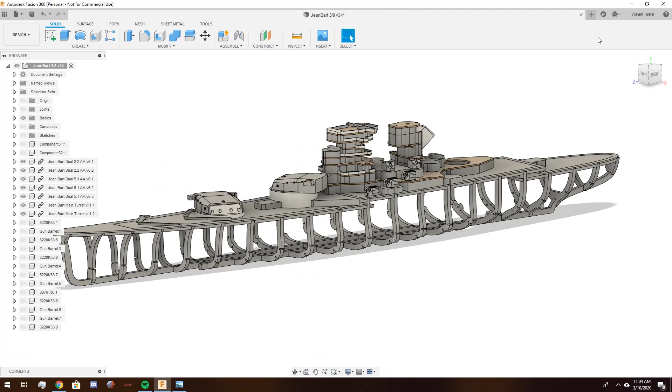So let's get started. One of the first things that you want to do on any of these kind of projects is you're going to need to insert a canvas. So let's just go ahead and start fresh. Let's close all these files out up here. So in your new Fusion 360 window, use the Insert tool. Insert Canvas. Insert from My Computer. And then navigate to wherever you have your chosen file.

Now, when I'm working, I like to have the ship oriented correctly. So as you can see right now, we are backwards. The back of the ship is facing the front in Fusion 360, so we're going to do a horizontal flip. Something else that I like to do is I like to try and have the canvas on the correct plane.

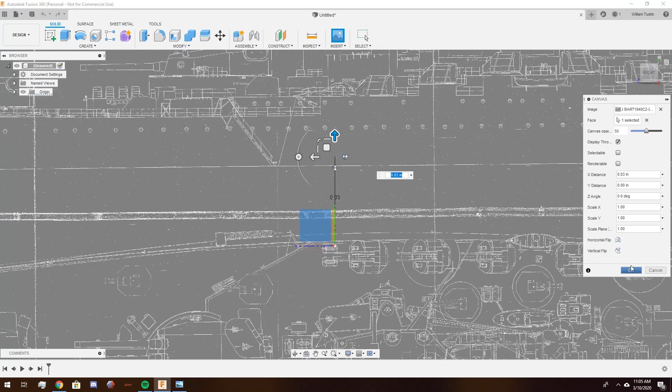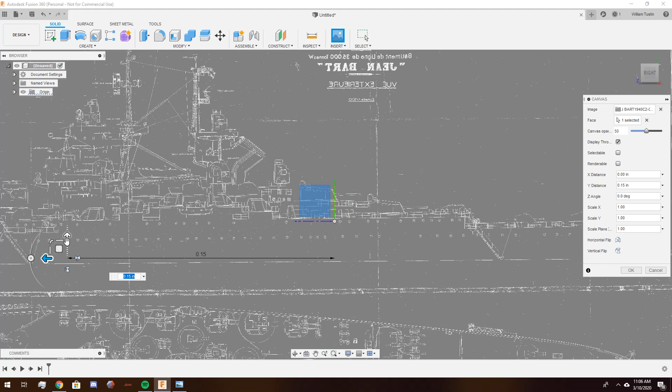So I am going to bring the canvas down because we're going to be working on the secondary gun turret, not the entire ship. I'm going to bring the canvas down and over. So that way the bottom of that gun turret is on that blue line, or as close as I can get it. All right, that looks pretty good to me. Okay, we have our canvas placed.

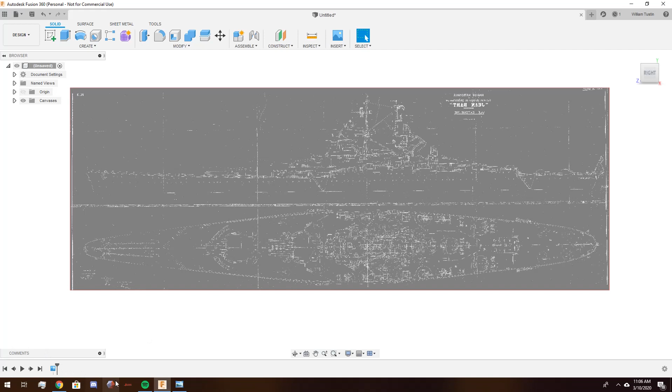Now, we need to make sure that our canvas is scaled properly. But before we do that, I just realized something. You can see down here, we have this little timeline bar. I don't normally like working in Fusion 360 with timeline enabled. So we're going to go up here to the document settings, right click, and click on Do Not Capture Design History.

Every person is going to be different in how they like to use this software. I do not like design history. It removes some of your potential options and some of your workspaces, and it's just not how my workflow works. So we're going to turn it off for this tutorial.

Anyway, we need to make sure that this canvas is scaled properly for the actual model ship. You can make your parts at whatever size this is right now. However, when you try to put a hole for a gun barrel or a bolt hole or anything like that, when you scale it up, it will not be the correct size.

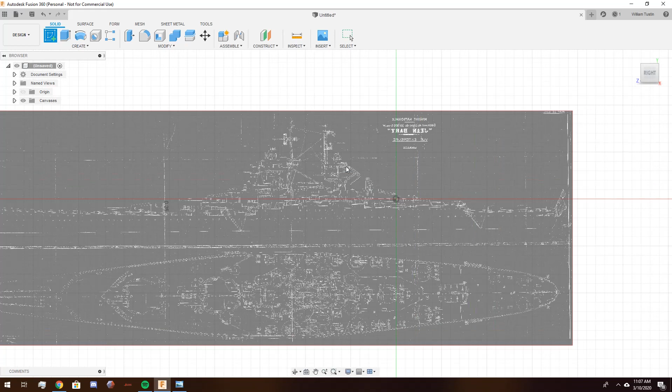So, in order to scale this, we're going to create a new sketch. And we're just going to click here on this plane. And then we're going to come over and we're going to drop a line. Drop a line on the ship's nose. And then we're going to do the exact same thing on the stern.

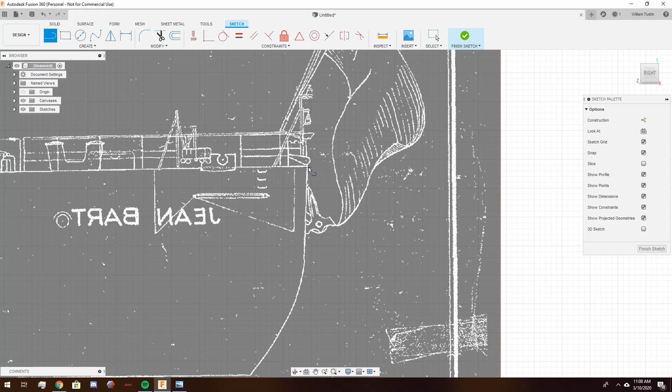And now we're going to measure using the Inspect tool. We're going to click on the line at the front, and we're going to click on the line at the back. And we have been given 0.651. Navigating over to the IRC website, we see here that Jean Bart is supposed to be 67.75 inches long. Bringing up the calculator, we can easily do the math, and we now have a percentage that we need to increase this canvas by.

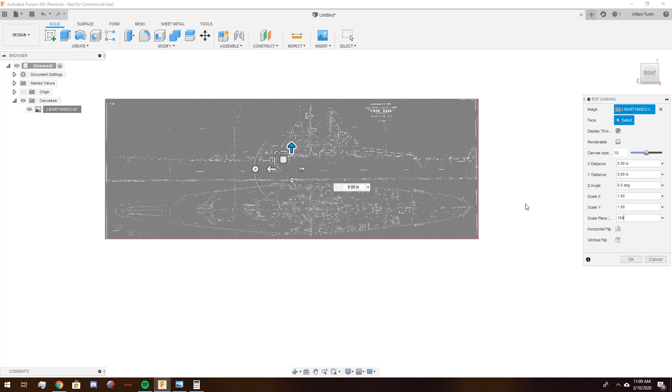So we bring up Fusion 360 again, hit close, hit finish sketch. This sketch will never be used again. You can go ahead and delete it. Select the canvas, edit canvas, and down here where it says scale plane XY, type in 104.07. And here we are. This sketch is now the correct size.

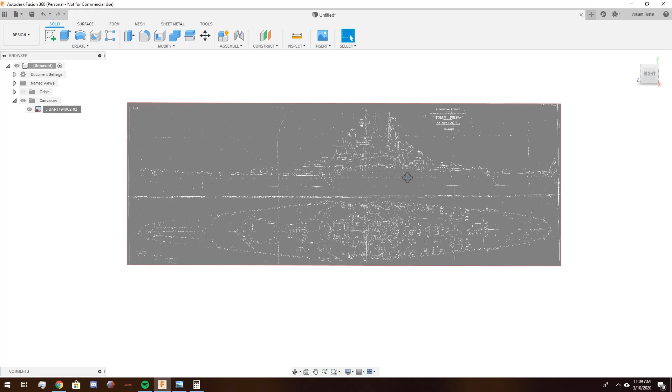Now, this is nice because this one picture gives us both the side profile and the top profile. However, I like having the top and side profiles where they actually would be on the model, instead of having to do all of my side sketches up here and my top sketches down here. So we're going to take this canvas and we're going to click Move Copy. We are going to create a copy and we are going to rotate it 90 degrees. Then we're going to click OK. Oh, no, we're not. That is not what I wanted.

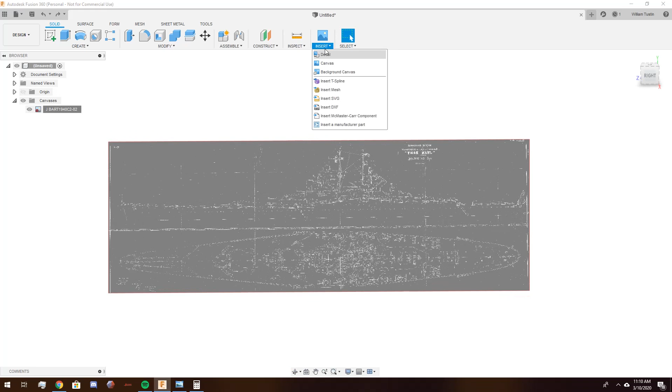I like having an additional canvas that gives me the top-down view directly where the top-down view should be. So we're going to go to Insert Canvas from my computer. We're going to insert the same drawing again, except this time we're going to insert it on this plane. We already know that it's too small, and we already know what the scaling factor is. So we're going to go ahead and scale it up by 104.07%.

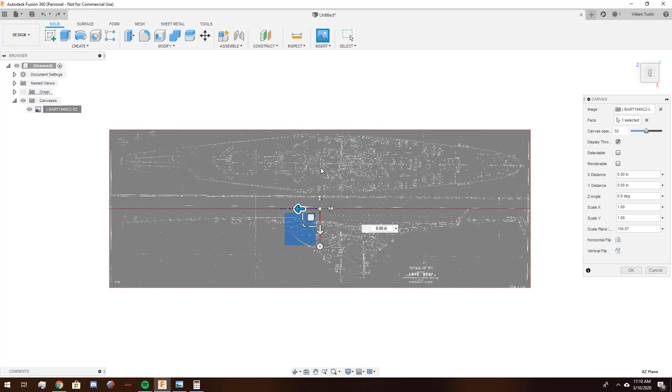Now we need to line up the center line on this top-down drawing. You can see it here, courtesy of the French engineers. We need to line that up with this red line. So I'm going to do my best here. And as you can see, this is not perfect.

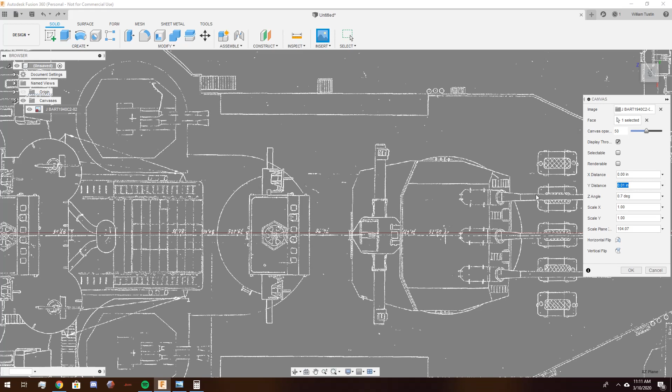In most instances, we are working with ship plans that have been microfilmed in the 1950s. So do not try to make this too perfect. You will chase perfection and will never reach it. But once I'm satisfied that is reasonably close, we're going to go ahead and click OK. And now at this point, this sketch, this canvas, and this canvas are now lined up, at least over the gun turret that we care about.

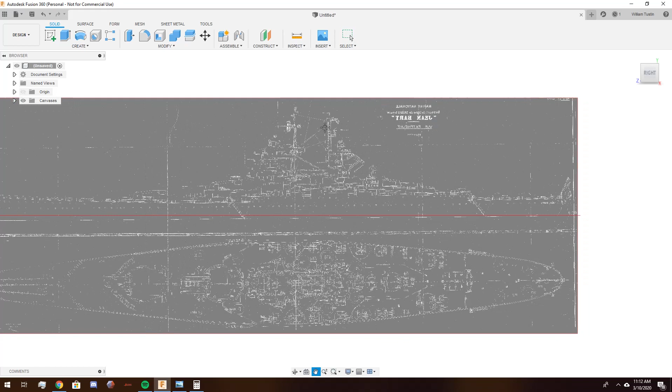All right, now it's time to actually start this. What I like to do is start with a top-down sketch. So we're going to go to the top view. We're going to zoom in on our gun turret, and we're going to click on Create Sketch, and click. When you click, it's automatically going to snap the camera to the origin point, XYZ 000 in Fusion 360. Let's go back to where our gun turret is. And I'm modeling the middle one. They are identical. I just like the middle one because it's in a little bit less crowded of an area.

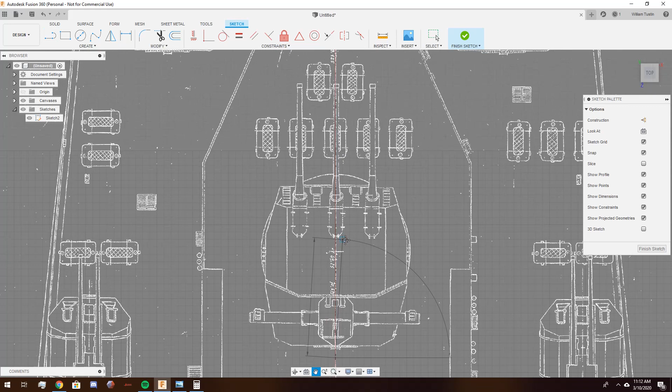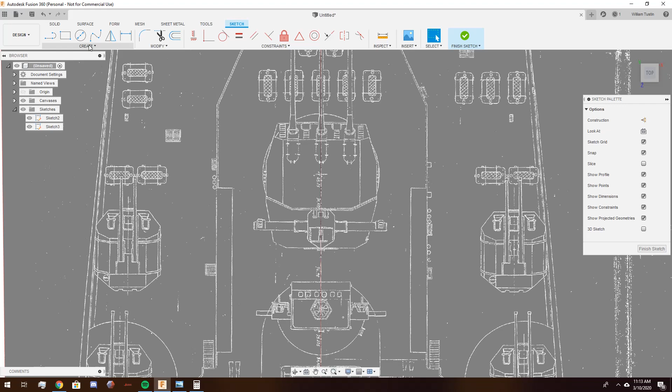Now that we're here, let's go ahead and just create a center line. This center line will be its own sketch, and it is going to be our mirror line for every other sketch we make. Okay? So now we're going to create another sketch immediately. We're going to go back up here to our mirror line. The next thing I like to do is create a sketch that shows us where the barbette is going to be underneath the turret. Create, circle. I like using a 2-point circle for this.

I'm going to zoom in on where the barbette is, and where that barbette meets the mirror line, I'm going to click to drop the first point of our 2-point circle. I'm going to move down the mirror line until the barbette looks like it's roughly the correct size. Now, don't be afraid to round up or down on this one by small margins. Remember, IRC rules dictate that barbettes don't need to be scale. On a secondary gun turret like this, which is normally not going to have a gun mounted in it, you could round down to 2 inches. You could probably safely round up to 2 1/8, which is what I think I'm going to do here.

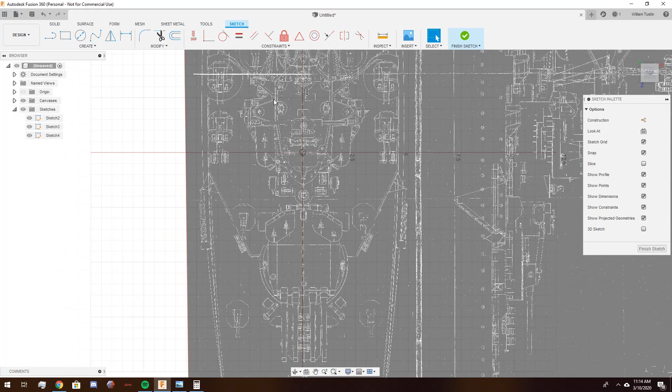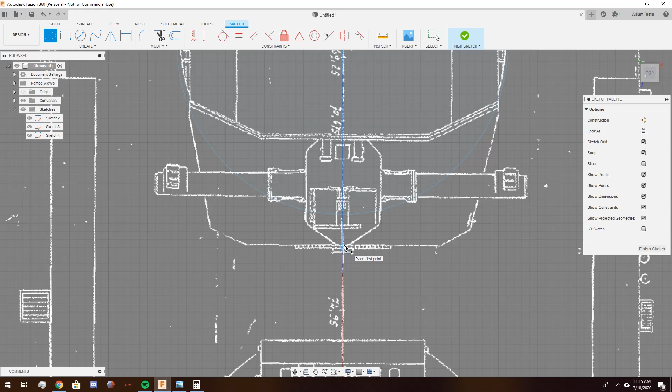And now I'm going to finish this sketch. So we have a mirror line and we have a reference for where the barbette is going to be in the future. Now it's time to actually start drawing the turret itself. One more sketch in the top-down view. Now, we have a mirroring line, and we can't be positive that we have our plans perfectly overlaid. So, you never want to try to draw the entire object. If you do that, you could end up with an object that is skewed or bent or warped in some way. Only ever draw half the object and then mirror it. That way, no matter what, the object will be symmetrical. It may just be a little bit too big or too tall.

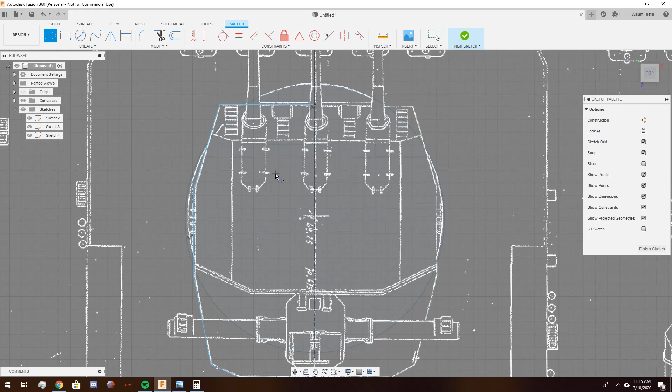So, with my mirror line right here, I'm going to zoom in and I'm going to start placing lines. Don't be afraid to manually adjust the distance, the length of your line, or the angle of your line. Sometimes the snap points in Fusion 360 can be a little wonky. If you believe that something should be a 90-degree angle, don't be afraid to go in there and just manually type that in. And that's it. We've successfully created half of our turret.

Go ahead and just double-click on those lines to select them all. And then up here, you can click on the Mirror tool. Click Mirror, Objects 6 selected. Make sure it has the lines you want mirrored. Mirror line. Select your center mirror line and hit OK. At this point, you can finish sketch. We've now created the top-down profile of our turret.

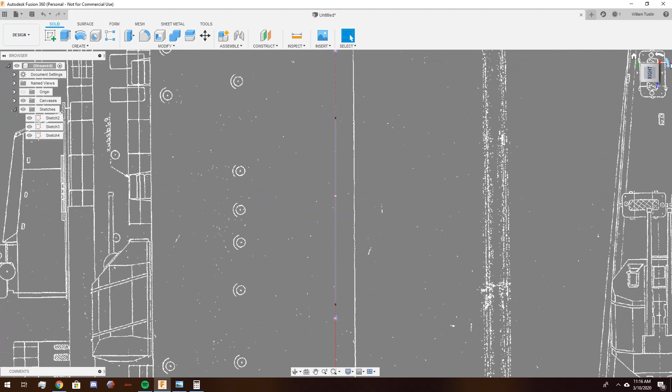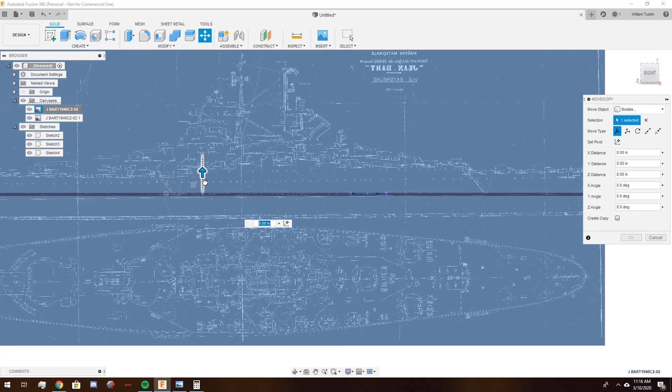Let's go ahead and transition now to the side view. Oh my gosh, we're upside down. Something you'll notice is our top-down view is not where we want our turret. One solution to this is to grab that canvas and just pull it down. Once again, you don't want to try to chase perfection here, but you would like to try to get this line, which represents the sketches we've just made, to be as even with the bottom of the turret on the plans as you can.

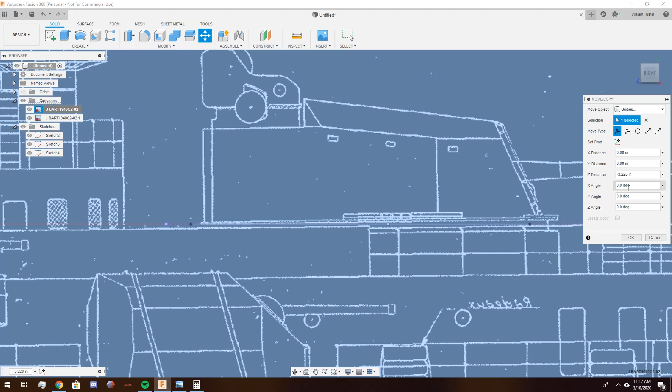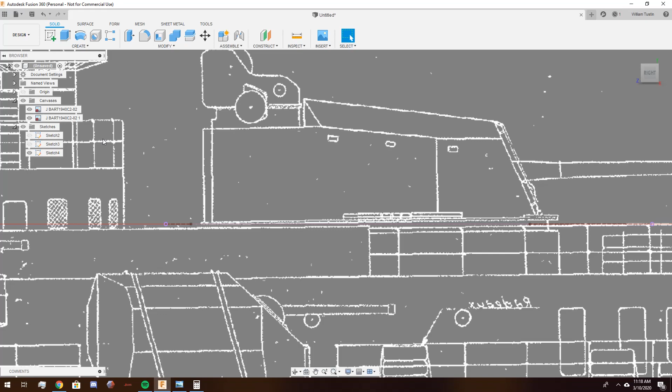And that'll be good for our purposes. It also looks like we might not be perfectly straight here. If you look and we turn off our barbette, our sketch for the top-down profile goes past the back of the turret. So we need to move that other canvas one more time. And all we're trying to do now is line this up. And it looks like that did the trick. Perfect. So we have our top-down view.

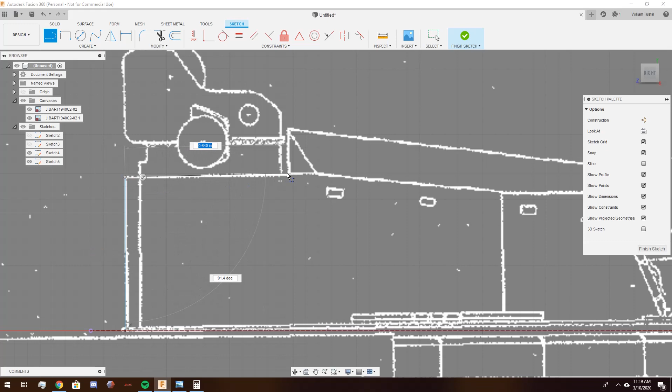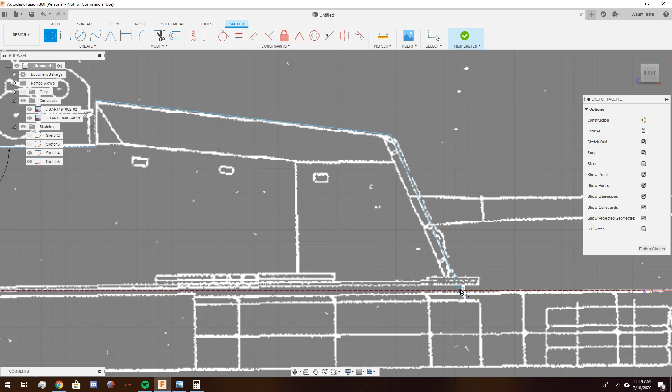Now it's time to create our side profile sketch. So go ahead and create a sketch, now looking at the right side. And just like for the top down, this doesn't need to be super perfect. Let's just go ahead and start placing some lines. Do not try to draw in the rangefinder slash director that's on the roof of the turret. We will come back to him later. Finish sketch. And now we have a side profile in addition to our top profile.

Now we can begin actually working with some bodies to make this turret a reality. Let's go ahead and click on our top-down face. And now we're going to extrude. Go ahead and extrude upward. You want to make sure that you extrude far enough that this body protrudes past the top of the side profile. Hit OK.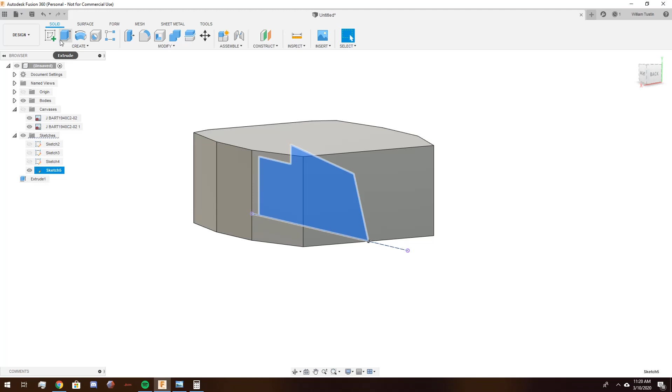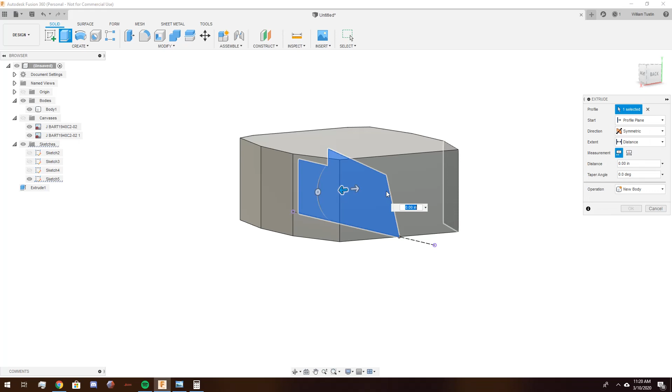Now, select your side profile drawing and hit extrude again. You might need to hide the body you've just created in order to actually click on that face. But once you've clicked on the face, go ahead and re-show the body so you can see what you're doing. Make sure that on this part, you select the direction of the extrusion and you make it symmetrical, because we would like this to happen to both sides of the object.

Go ahead and pull it out and see what happens here. It thinks you want to use this side profile as a cutting tool, which we know is not correct. Go here to Operation and change Cut to Intersect, and then hit OK. Now we're left with a body, which is where those two sketches intersect in space. It looks a little bit like a Jean Bart secondary gun turret, but we're not quite there yet.

There's another plane that we unfortunately do not have plans to work with. We need to cut this turret along this front face, back face technically, the front face of the turret where the gun barrels will protrude. How are we going to do that without a stern-on view of the ship? There are a few options. One, you could find a stern view of the ship. Two, you could use a three-dimensional reference, like a model from a video game.

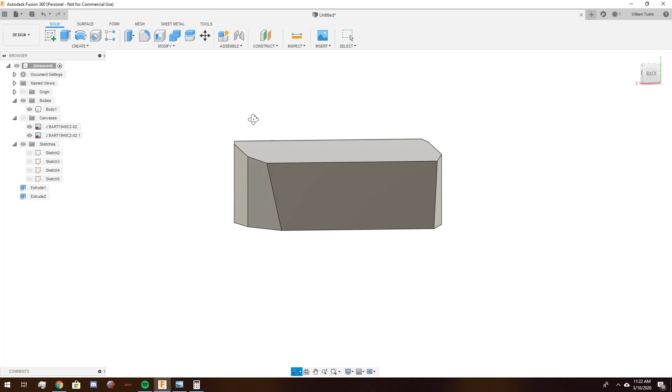But I want to caution you against the idea of trying to use the video game model itself for this project. 3D models out of video games are bodies made out of surfaces. They are generally not solid objects, and they are extremely dense in terms of polygon counts. They're created by artists in programs that are not really designed for engineering, whereas Fusion 360 is an engineering application. So they don't translate over very well. Use it as a three-dimensional reference, just something for you to look at and try to figure out. Don't try to just copy it.

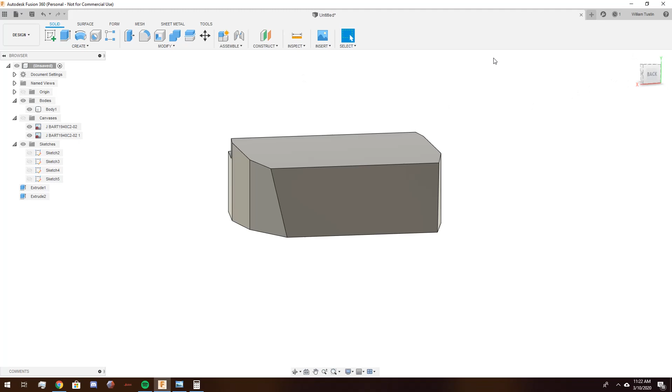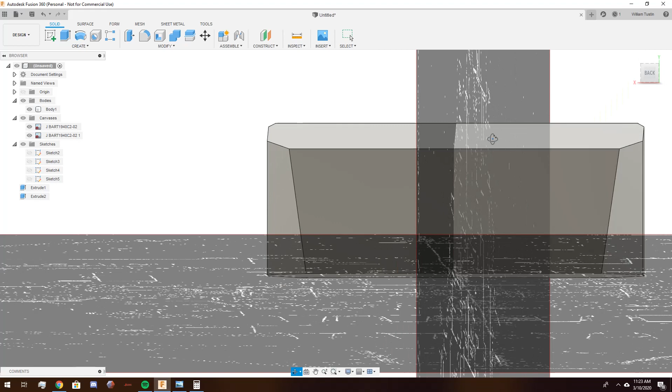Now, the final option is to use our two viewpoints that we do have to extrapolate where we need to cut this. So let's bring our canvases back. Now let's look from the side here. You'll notice on the plan drawing these lines. These lines exist because that is where the face changes. Let's look at the top. Same thing here. I wonder if we drew a line here and we drew a line here, if we connected those two, we would technically be creating a triangle. And we'd have enough information to make a plane that would then let us cut this turret. So let's do that.

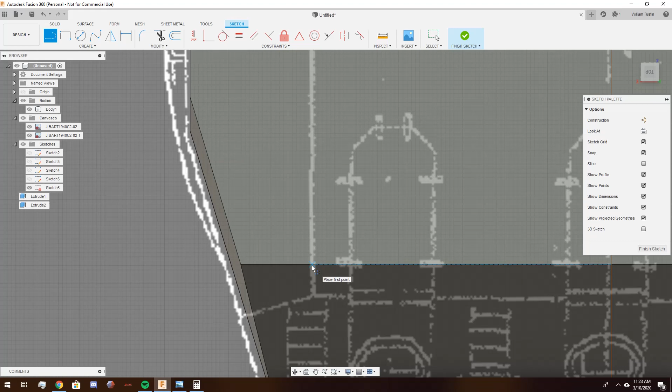What we want to do is select the top face of the turret body we've created. Right-click and create sketch. I'm going to use the line tool to create a line that's coincident with the edge of the top of the turret, perpendicular to that top front edge, and goes all the way to the back edge and is perpendicular to that edge as well. That's it for this line. Finish sketch.

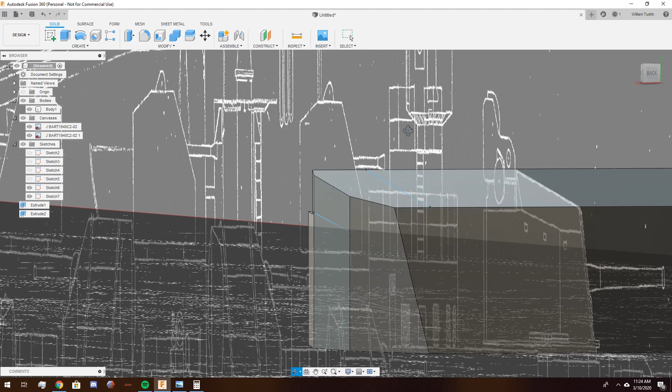Now, we're going to do the same thing on this side face of the turret. Right-click, create sketch. Line tool. We're going to create a line which is coincident with that line and coincident with this line and follows the line on the plans. Finish sketch. Now if you look, we've created 2 points in space. Technically 4 points in space. You only need 3 points to create a plane.

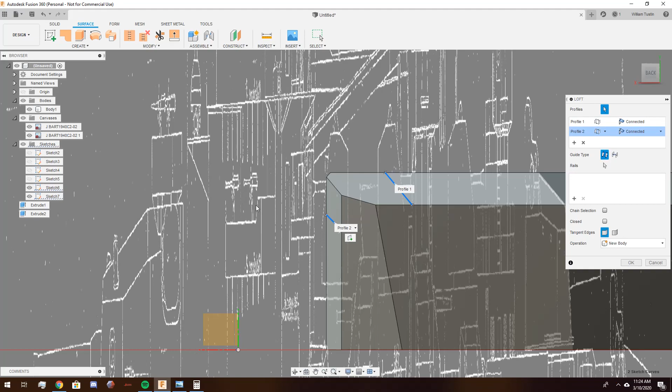So we're going to go over to the surface workspace, create loft. And we're going to click on the first line and then the second line. If we turn off our turret body, you'll notice that we've created this flat surface. Let me remove the canvases. We've created this flat surface. Click OK.

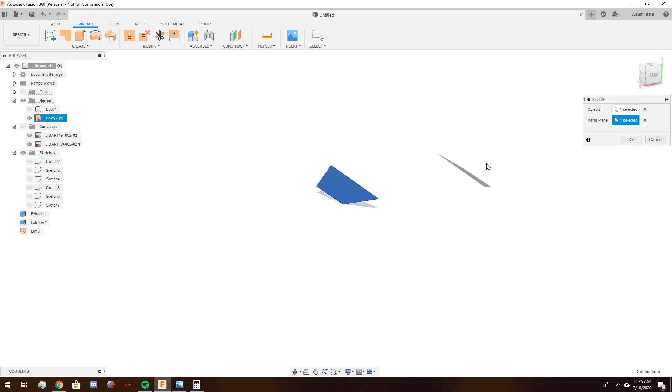This is going to become our cutting tool for cutting our turret body to match the real ship's turret. But we need to do it on both sides. So let's select this surface, create, mirror. The mirror plane is going to be the plane that we're working on right now. So click that there, and you'll see that it's created a ghost copy of the object we're copying. Use this so that way you can preview and make sure that you're actually doing what you want. Go ahead and click OK now.

At this point, we are ready to start cutting our turret. So let's go back to the solid workspace and let's show our turret body again. Click on this tool, which is Split Body. Body to split is going to be your turret body, which for me is body 1. Splitting tools, if you hold shift, you can select multiple. It's going to be our 2 cutting faces, body 2 and body 3.

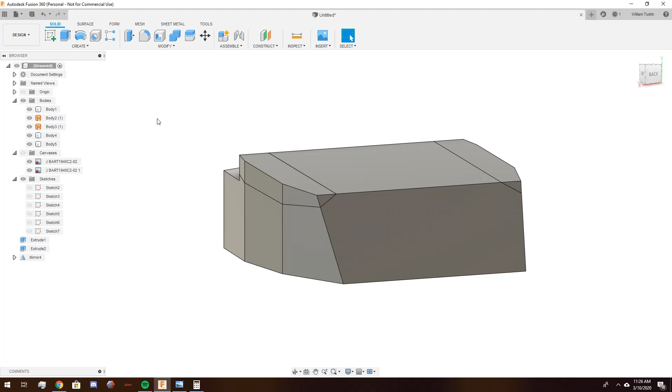Now you'll notice it's only cutting exactly where those bodies are, which is not exactly what we want. So make sure that you click Extend Splitting Tools. OK. Now we have 5 bodies because we've split our turret body into 3 separate pieces. Let's go ahead and hide everything except body 1. And there we go. We're starting to get something that really looks like a Jean Bart secondary gun turret. Let's bring our canvas back up and see how we've done. Well, that's looking pretty good.

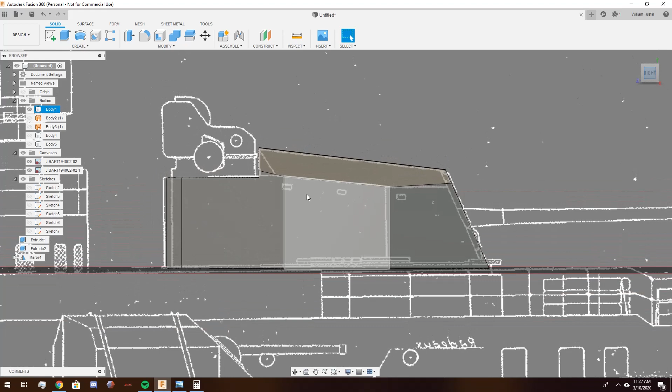But there's one more thing. If you look, there's another line here. And if we look from the top, you see these lines here. We need to make sure that we show that on our Jean Bart gun turret. So we're going to need to create another sketch on the top of the turret.

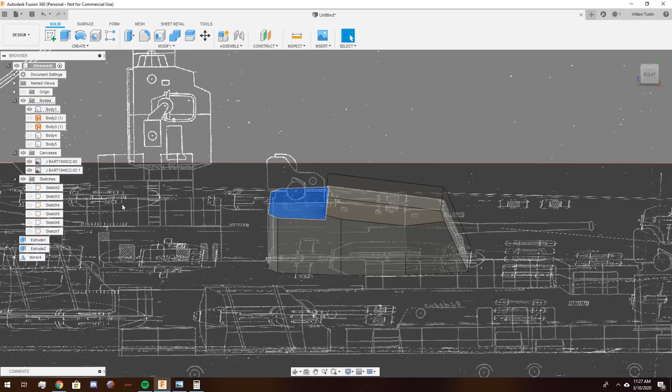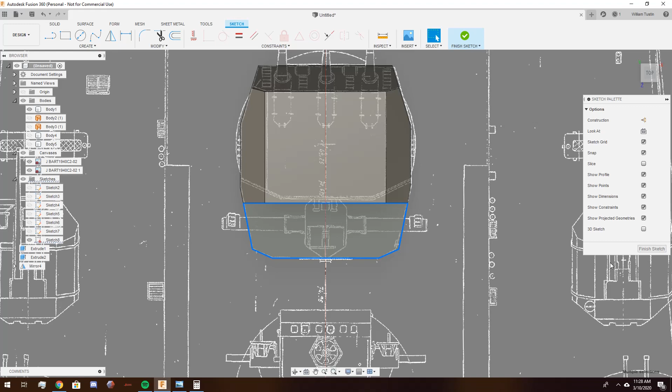But this time, let's create the sketch on this back piece. Because if we create the sketch here, it's going to be along this plane. And we don't really want that. This plane is parallel to the x-axis, meaning it's flat pretty much. So select that surface and go ahead and hit Create Sketch. Just like before, every time you create a sketch on an existing body's face, it pulls that face information for you. So now we're going to create this cutout for our turret.

Something to remember is these plans are once again not perfect. Even though they're the original shipyard plans, they're 80 plus years old and they've been microfilmed and then digitized. As you can see, the turret we've created, some of these corners do not quite line up. This point here, for example, and this point up here. So using your best judgment, try to figure out where you would like this to go.

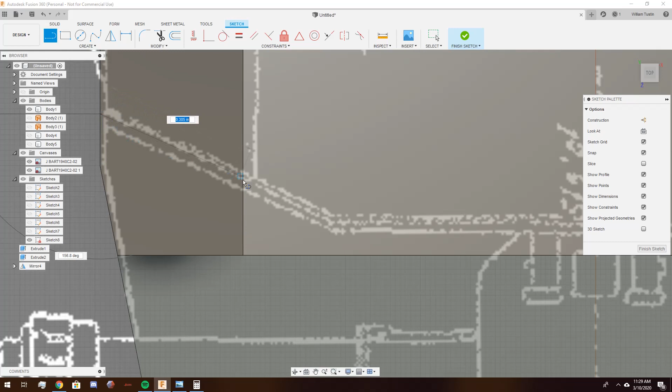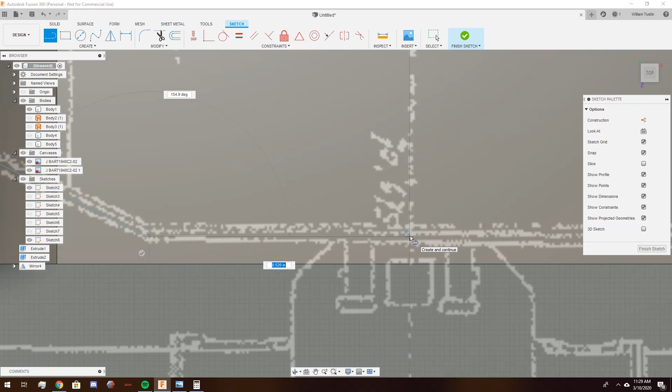I think I'm going to use this point right here. And I'm going to draw this line out to about here. And I'm going to bring this line into the mirror line, which we need to make sure we have enabled. And I want it to meet the mirror line at a right angle. And just like before, we're going to mirror this along the mirror line. And now I'm going to hide the body and the canvas.

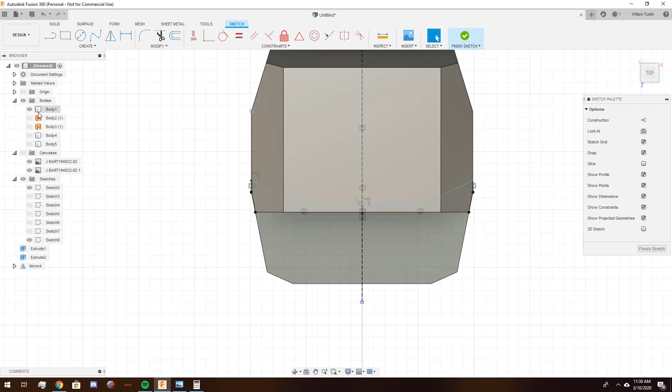We need to now connect this so that way this is a solid face for us to actually work with. So let's bring our body back here. And we're going to click on our sketch point and just work our way down the turret to preserve its geometry into our sketch. We can hide the turret body again. And as you can see now, we have created this face. Finish sketch.

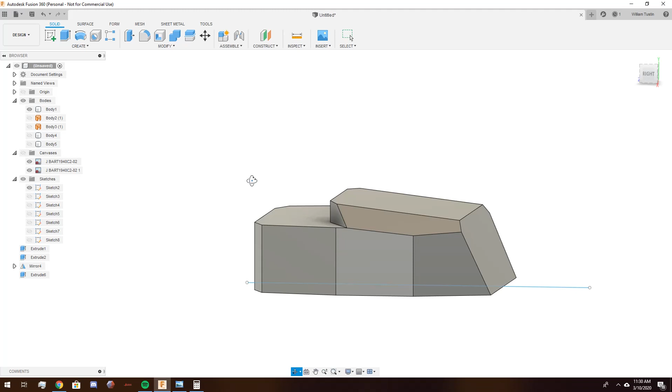Now we're going to take this face and we're going to extrude upward, letting it form a cutting tool for us. And hit OK. That is starting to look a lot like a Jean Bart secondary gun turret. Let's bring up our canvas again. You can see here, it's not exactly perfect, but if you try to chase perfection with this, you could be here for hours doing a half-an-hour job.

So now we need to model one of the last big physical features of this gun turret, and that's going to be the rangefinder / director that's mounted on the back.

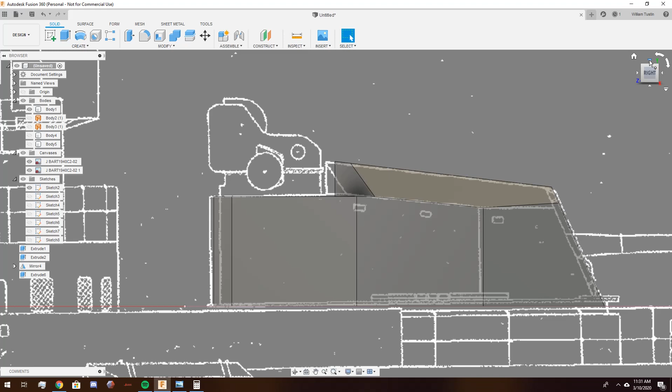We're not going to do it the way that we've done the actual turret, though, because there are some overhangs and whatnot on this rangefinder that are not exactly easy to notice when you're looking at the plans if you blindly follow my directions. So let's take a look here. We can see this shape right here that's underneath this overhang.

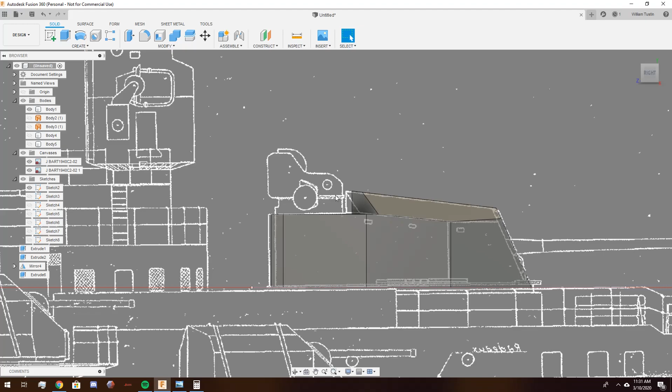This shape is actually a cylinder because this rangefinder, I know from reference photos of the actual ship, is mounted on a cylinder. And when we look at it from the top down, it's a hexagon. Actually, it's an octagon. There's 8 sides. This octagonal shape does not go all the way down to the turret because of the small cylinder that it is mounted on. So the first thing we're going to want to do is model that cylinder. But we don't know much about the cylinder.

So let's create a sketch here on the side profile. And we're going to create 2 points. And now we're going to measure between those 2 points, just like we did for the length of the ship. And we end up with 0.535 of an inch. That's the diameter of our cylinder. Now, let's measure how long one of these lines are. 0.123 of an inch. I'm going to round that up and say 0.125 for a nice eighth of an inch.

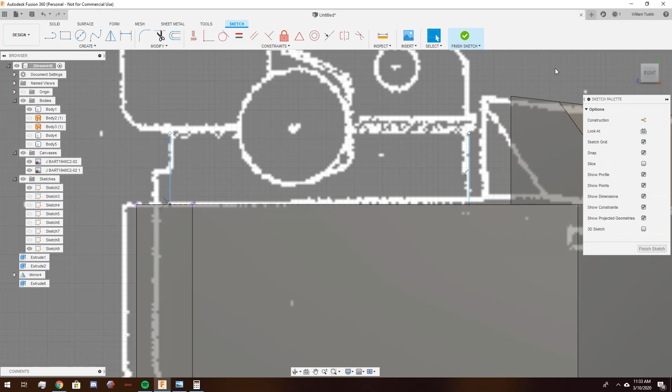We need to create a cylinder that's 0.535 in diameter and an eighth of an inch tall. So let's finish our sketch. That sketch is just measuring and is useless to us, so we can go ahead and delete it. Let's look at the top profile again. And with our mirror line still here, we're going to click on Create Cylinder. Create Cylinder is just a very quick way to create a solid body without needing to create a separate sketch.

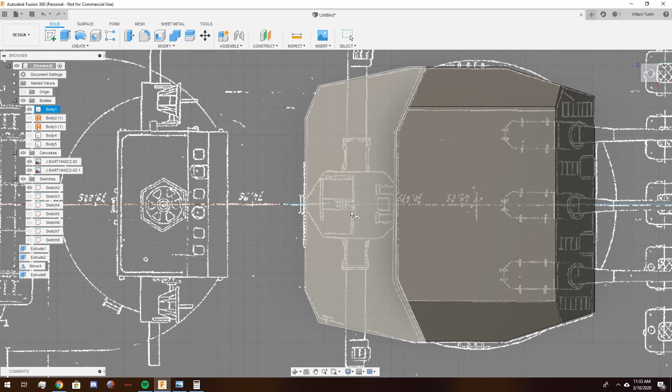So with the Create Cylinder tool active, go ahead and click on this flat surface, which is the rear roof of the turret. And we still have our mirror line here. So go ahead and find some place that's about where you think the center of that cylinder should go, and go ahead and drag it out along the mirror line until you reach about 0.535. And we're going to let it extrude upward by 0.125. And there's the beginning of our rangefinder.

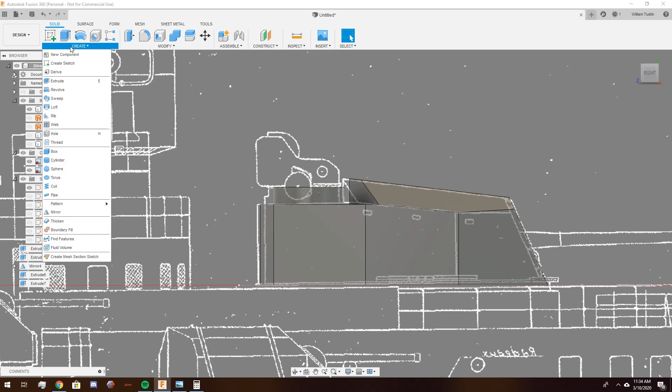Now, the next easiest part of our rangefinder is going to be another cylinder. So let's go ahead and create cylinder on this side profile. And I'm going to put the center as close to this dot on the plans as possible. As you can see, the dot on the plans is quite large. So I'm just going to guesstimate a spot, and I'm going to pull this out. And I'd like to make this a nice round fraction. 0.25 is way too big. 0.125 is way too small. So I'm going to go for a nice 3/16 of an inch.

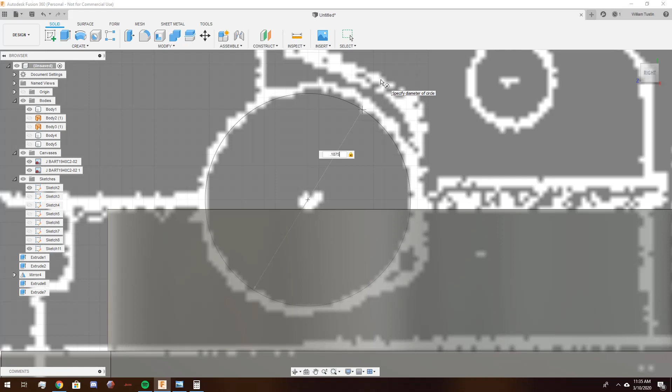And now we need to extrude it outwards. Oh, it's trying to cut. We don't want to cut. So we're going to go ahead and select this, and we also don't want it to join, for a reason I'm going to explain in a moment. So let's just select new body for now. And while we have the extrusion still active and we can adjust the length, let's transition to the top-down view, so that way we can make sure we get the rangefinder arm the correct length. Looks like it wants to be about 1.17. Go ahead and click OK.

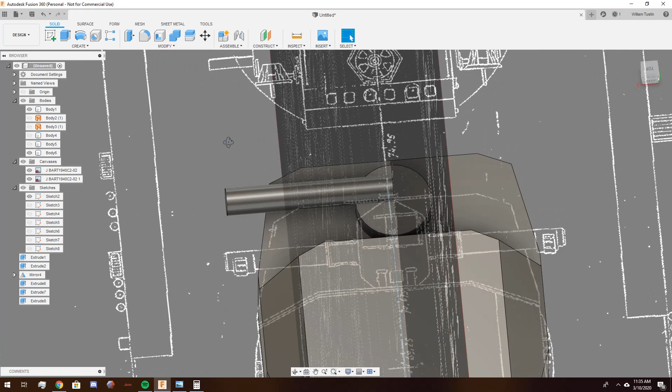Now we need another one. So the same way we've mirrored everything else, we're going to select that body, create, mirror, mirror plane, and we're going to check our preview to make sure it's what we want. Okay. Perfect. Now we need to create that octagonal shape from the top profile. We already know that that octagonal shape does not reach all the way down to the turret roof. It stops where the cylinder base stops. So we can create our sketch for this piece on the top face of that cylinder.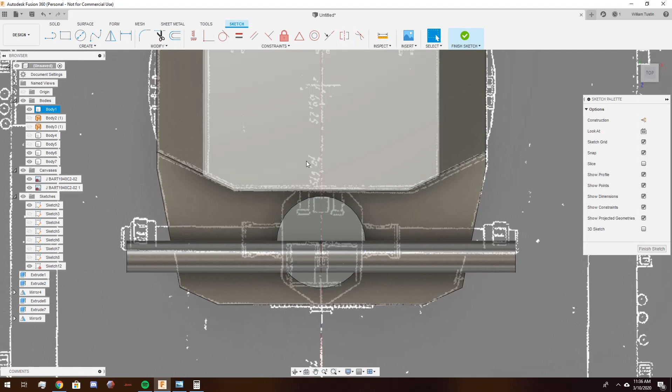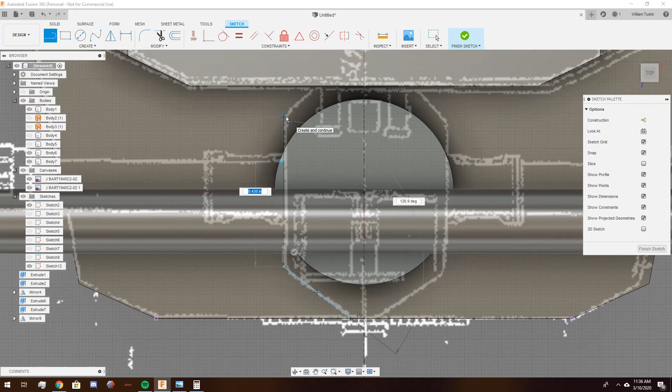I'm going to work from the back simply because the front's getting a little crowded. Okay, I've created 1/2 of my rangefinder roof. I'm going to mirror it along my mirror line. And now I've created the entire thing. Finish sketch. Now we need to extrude this upward. Make sure that when you go to extrude this body upward, that you select the entire body, because there are multiple shapes here because of the different faces that were projected into our active sketch. So you need to make sure you get this face, and this face.

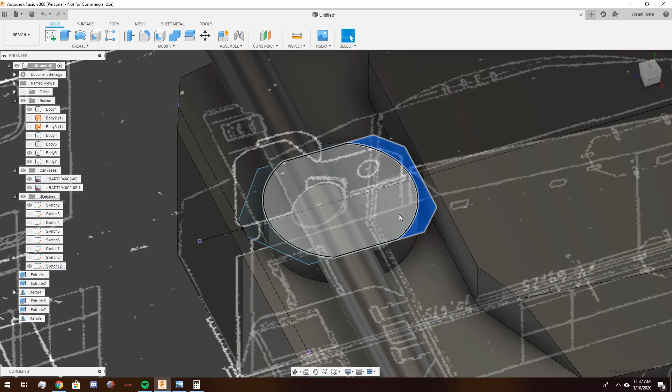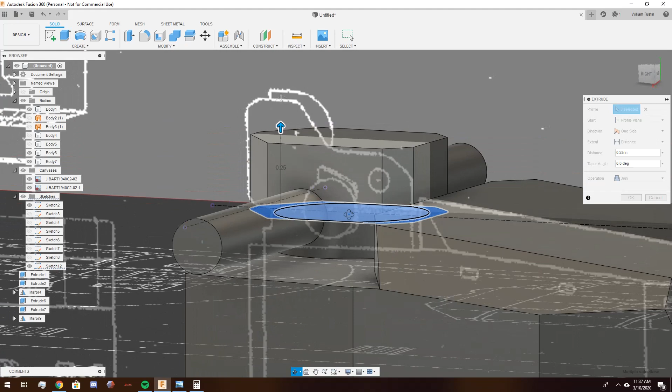And now we're going to extrude upward until we're roughly the correct height. I'm going to say a nice 1/4 of an inch. Once again, it's trying to cut. We are going to let it join. And now when it joins, it's going to join the two rangefinder arms and the rangefinder base to itself. We're going to hit OK. Let's turn our canvases off, turn our sketches off, and let's take a look here at our finished product.

We've created a Jean Bart secondary gun turret. It's very simple. From here you could go as complex as you'd like, but at this point I believe this is good enough. It's a combat model. If you were building for scale accuracy, we've already lost.

One thing we definitely need for a dummy secondary gun turret are holes for gun barrels. I strongly recommend not trying to print gun barrels - it normally never works right. 3D printers do not like cylindrical objects. What I recommend is using a sketch to drill holes in your model, so that after printing you can use metal tube or wooden dowel rods to make your dummy gun barrels.

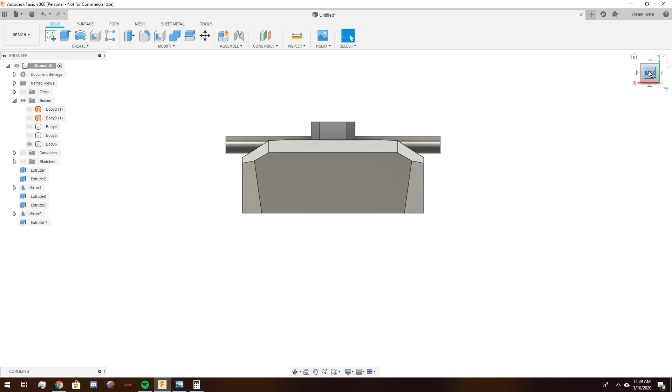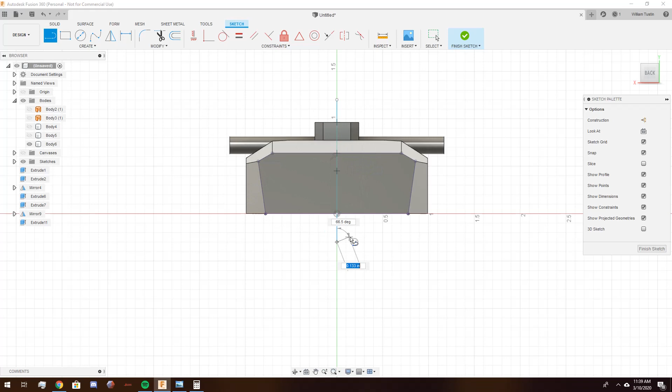So looking at the back or front face of the turret itself, we're going to create a sketch. I'm going to select this face here and hit P to project it into our sketch. Now I'm going to create a line right down through the middle of the turret and hit OK. By projecting the turret face like that, I can use this line right here - see how it's created a little triangle icon? That means we're at the middle of that line.

I'm going to click and drag it through the center line to meet on the other side. Now, if we assume the middle gun barrel on this turret is actually in the middle of the turret, we can place a point there. Then we can make a line from the center line to the edge again, and the same thing on the other side. Then we can place points in the middle on either side. Finish sketch.

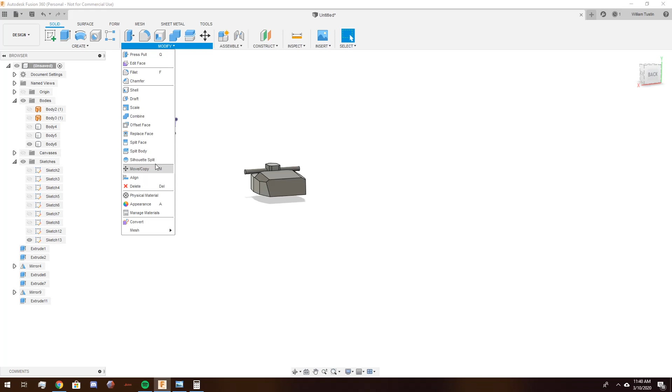Now that sketch is way in the back - well, it's actually at origin, and we already know our body here is not at origin. So we can fix that by clicking on the alignment tool and aligning the bottom line of our sketch to the bottom line of our turret face. Oh, there we go.

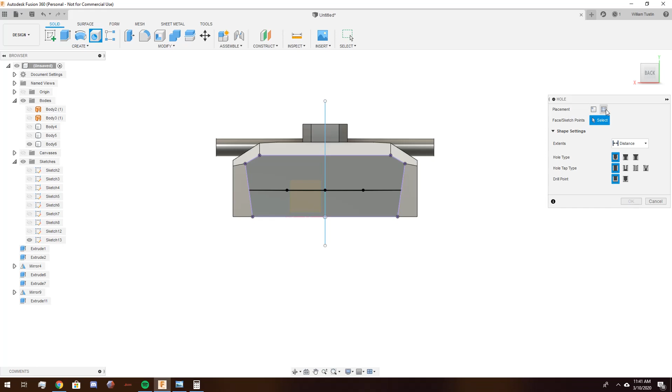Now we're going to use Fusion 360's Hole tool. For placement, click on From Sketch, and then select your three sketch points.

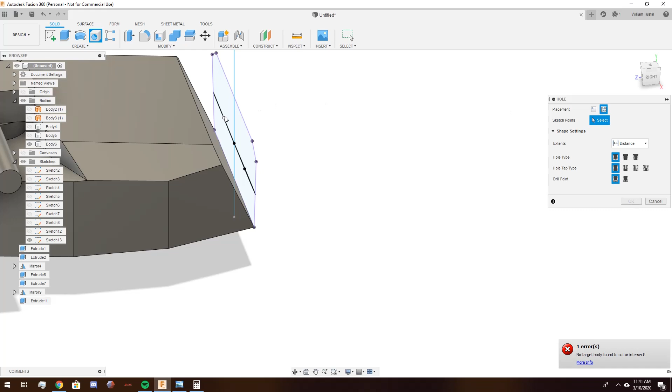Now right now Fusion 360 is giving us an error. Oh, it thinks we want to drill the wrong way. That's not correct. Fusion 360 seems to believe we want to drill the wrong way. So in order to get around this, we are going to use the Hole tool and click on... no, okay, it still doesn't want to cooperate. Fusion 360, what the heck? I'm sure someone here is smarter than I am. Oh, flip direction - there we go. I knew I'd figure it out.

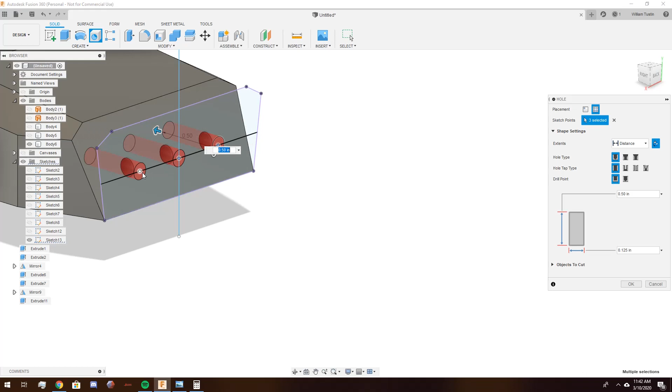So let's go ahead and just select our sketch points here. It's up to you to determine what diameter you'd like to use for your gun barrel holes. A scale size would be extremely small. I'm going to use a nice 1/8 of an inch, because that's half the size of our 1/4 inch boat gun barrels. And I'm going to have them go into the dummy turret 1/2 of an inch. Hit OK.

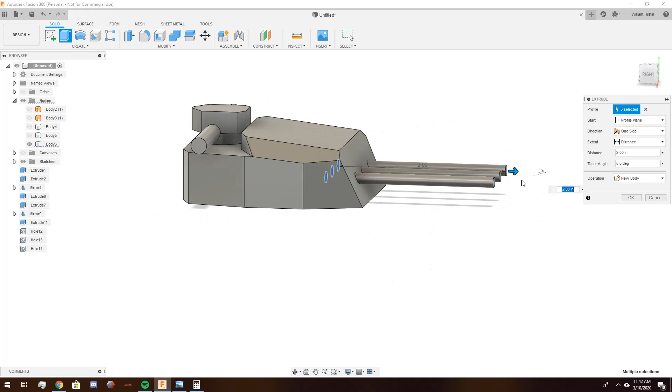And there we go. Now, if you want to see what this is going to look like, you can reach in here and select the circular faces at the bottom of the holes you've created, and actually extrude them outwards as new bodies to see what it will look like with gun barrels.

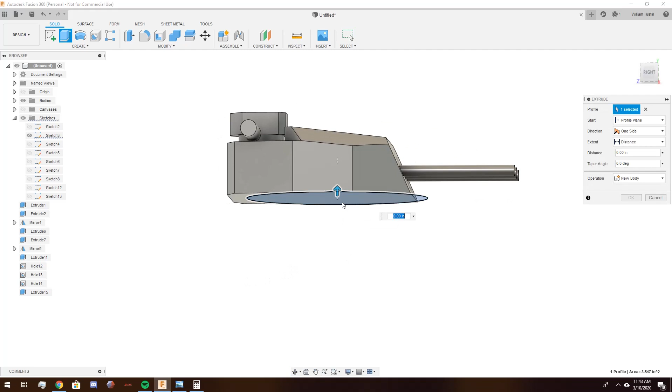We're almost done at this point. The only thing I'd like to add is our barbette. So remember our barbette drawing from earlier? We're just going to go ahead and extrude that downward, let's say an 1/8 of an inch. And there you go - that is a perfectly acceptable quality Jean Bart secondary gun turret.

Using these principles, these basic abilities that you've hopefully learned by watching this video, you can apply them to anything. When you get into more complex objects with curves, you have to get into using splines in your sketches instead of straight lines. But this is essentially how everything in Fusion 360 for Model Warship Combat can be modeled.

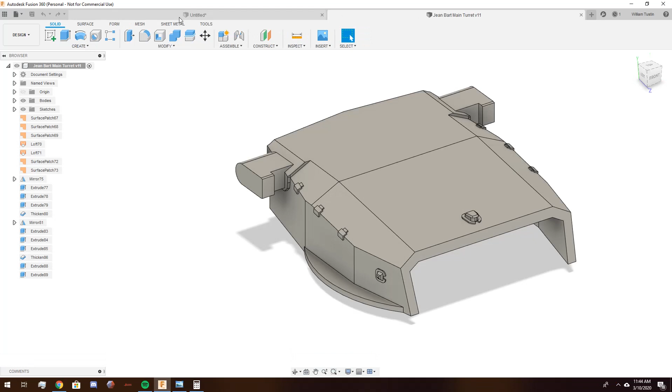Everything from simple secondary gun turrets all the way up to something like this, which is a much more complex, hollowed out main battery gun turret. All this is a bunch of sketches that have been extruded and cut and aligned together. Little details like these armor buckles can be added, these periscope ports can be added. It's all about how much time you'd like to spend modeling your model.